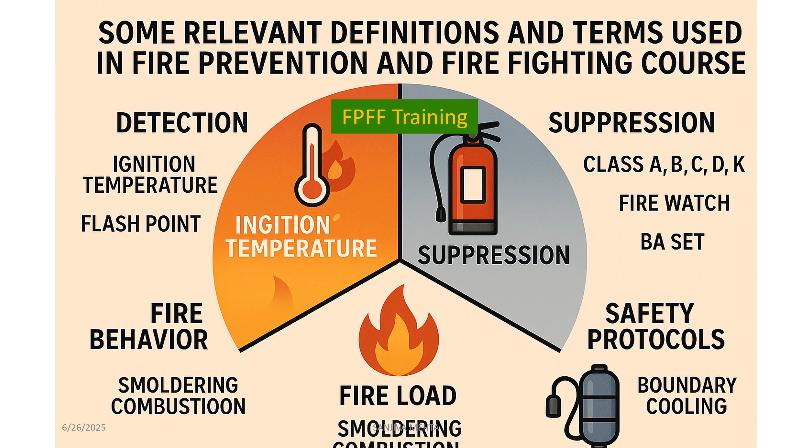In this, we will be talking about some of the terms which are used in the context of firefighting. Okay, fire prevention and firefighting. Basic firefighting. It's a mandatory course. Every seafarer has to do it before he joins the ship or any offshore platform. So this is module 2 we are going through, and this is chapter 3 of module 2.

In this, we will talk about relevant definitions, terms which are used in firefighting training, for firefighting purposes, and also in the FPFF course, so that you understand the meaning of those terms. All right, and then we'll proceed further.

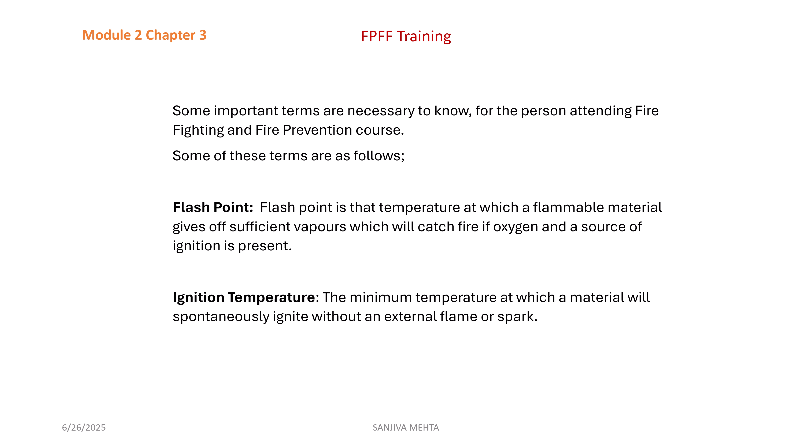Spontaneous ignition. It takes place when the flammable material is heated to its ignition temperature. So we know the ignition temperature is the temperature at which vapors catch fire. In spontaneous ignition, sometimes this temperature is reached through oxidation, which I was explaining. During oxidation, heat is given off.

Although the outside temperature, or the temperature where the oily rags are kept, is not that high enough to cause ignition, because of the oxidation taking place of the oil in the oil-soaked rags, the temperature is rising, maybe in a limited area. That reaches ignition temperature and it catches fire. So we say spontaneous ignition has taken place.

So spontaneous ignition also takes place when oxidation of flammable material takes place, like oil-soaked rags. Because of the oxidation of the flammable oil, heat is generated. Fire may occur without any apparent reason.

Flashover. The near simultaneous ignition of all combustible material in an enclosed space where temperatures are extremely high.

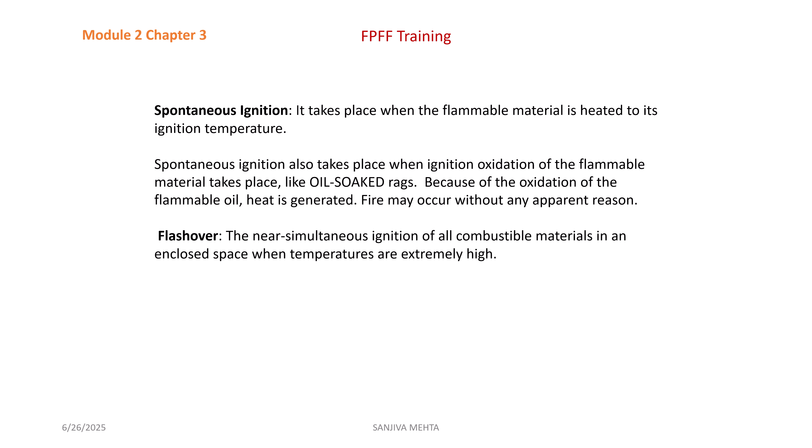Flammable material, inflammable also. It's the same thing. English language is confusing, nevertheless. A material which is capable of being ignited and burning, that is combustion, is a flammable material. For the purpose of our course, the terms flammable and combustible material are interchangeable and have the same meaning. Also inflammable material.

Fire extinguishers, portable devices used to put out small fires. They are categorized by their extinguishing agent: foam, CO2, dry chemical. There can be 9 liters, 9 liters more common. There can be 36 liters also. They're kind of fixed actually. Portable ones, which you can carry, generally are 9 liters. The 36 one, you can say, is not exactly portable, but fire can be fought at a distance also, because the hose can be laid down.

Fire detectors, devices that detect the presence of smoke, heat, or flame, triggering alarms to alert the crew. Because whenever smoke is present, whenever heat is present, large amount of flames are present, fire is likely to take place. That's why these fire detectors.

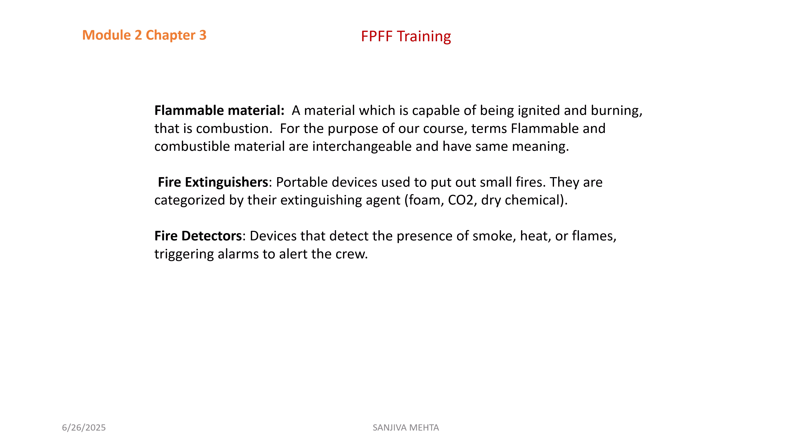Firefighting system, built-in system on ship such as CO2, which floods the engine room, for example, or the cargo hold, hyper mist, sprinklers, or foam systems designed to extinguish fires in a specific area like engine room or cargo hold. Hyper mist has become very popular nowadays. We'll talk about hyper mist in a separate issue.

Hyper mist basically is a sprinkler, but a much improved version. Hyper mist can be used even on electrical equipment. How? Why? Because in hyper mist, water particles are so small, but they have a large surface area because there are a number of them. The moment they fall, they evaporate, taking the heat away. So it quickly cools the specific area where the hyper mist spray has been aimed. Very interesting. Okay.

Breathing apparatus. A protective device providing a supply of clean air, allowing firefighters to breathe in smoke-filled environments. We need oxygen. If the area is filled up with smoke, how to breathe? So we use the breathing apparatus. SCBA, commonly called self-contained breathing apparatus.

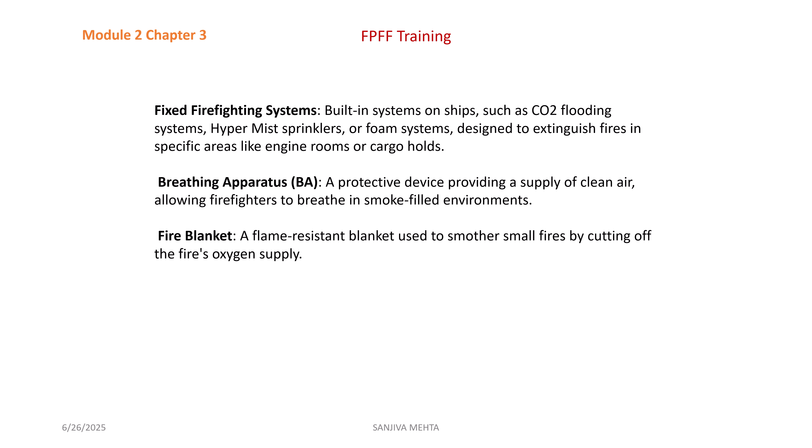Fire blanket, flame-resistant blanket used to smother small fires by cutting off the fire's oxygen supply. Smothering, fire dies down. Boundary cooling: the practice of applying water to adjacent areas of a fire to prevent heat transfer and contain the fire spread. Let us say the economizer, exhaust gas boiler in the machinery spaces is on fire. You start spraying the casing with a large amount of seawater. All right, so it will cool down.

Inert condition, a condition in which oxygen content throughout the atmosphere of a tank has been reduced to 8% or less by volume by addition of inert gas. Usually, it is referred to in context of cargo tanks of oil tankers. Earlier I had informed you fire cannot sustain if oxygen percent is below 12%. But mandatorily, inert condition means oxygen percent is less than 8%. So there is, you can say, a safety factor. All right, because 12% is touch and go. So we make it much lower, 8%.

Gas free. A tank, compartment or container is gas free when sufficient air has been introduced into it to lower the level of any flammable, toxic or inert gases to those required for a specific purpose. For example, hot work, entry, etc. And usually it is also referred to in the context of cargo tanks on oil tankers.

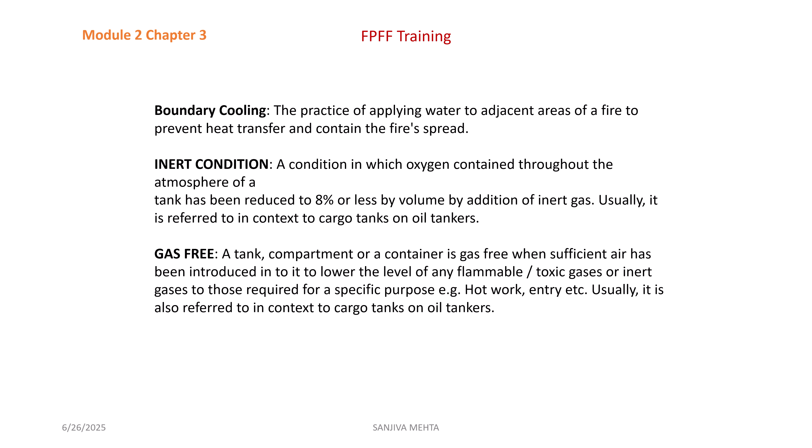Lower flammable limit. Flammable vapors, to burn, require a minimum or lowest percentage of these vapors in air to get ignited when a source of ignition is introduced. Some percentage of hydrocarbon or flammable material vapors has to be there. If the percentage of flammable vapors is below this percentage, the mixture of flammable vapors and air will not burn, no matter how high the temperature. This lowest percentage is called LFL or LEL, lower flammable limit or lower explosive limit. Similarly, we have a higher limit also.

Flammable vapors to burn requires a percentage of vapors and air to get ignited when a source of ignition is introduced. If the percentage of flammable vapors is above a certain limit, the mixture of flammable vapors and air will not burn. This is called HFL or HEL, higher flammable limit. So there is too much percentage of flammable vapor, hydrocarbon. Fire will not take place. Okay, too much of everything is bad.

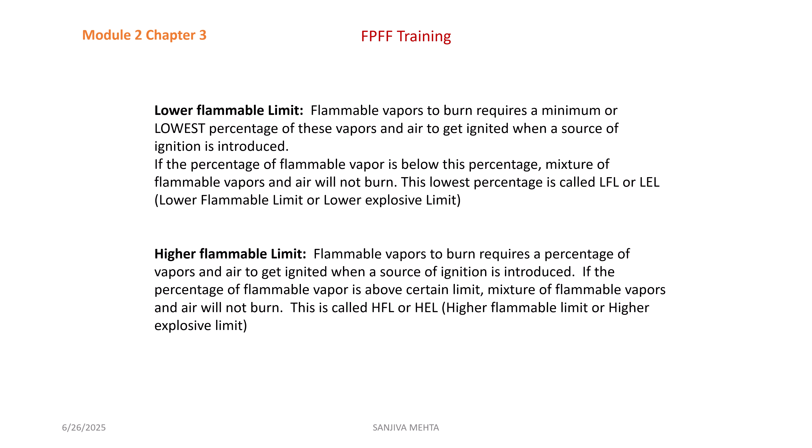So generally, the limit between LEL and HEL or HFL is called the flammable limit, range of flammable limits. Generally, LEL and HEL limits refer to hydrocarbon vapor percent. Therefore, flammable range refers to hydrocarbon vapor percentage between the LEL and HEL. Flammable range for most hydrocarbon vapors is between 1 to 10%. A little bit of variation, but generally it is 1 to 10%.

Hazardous area. An area on a tanker vessel where electrical equipment which is installed must be explosion proof, also called flame proof. Why is this area called hazardous area? Where the hydrocarbon vapors are expected to be present and they are expected to be in the flammable range. That's why it's called hazardous area.

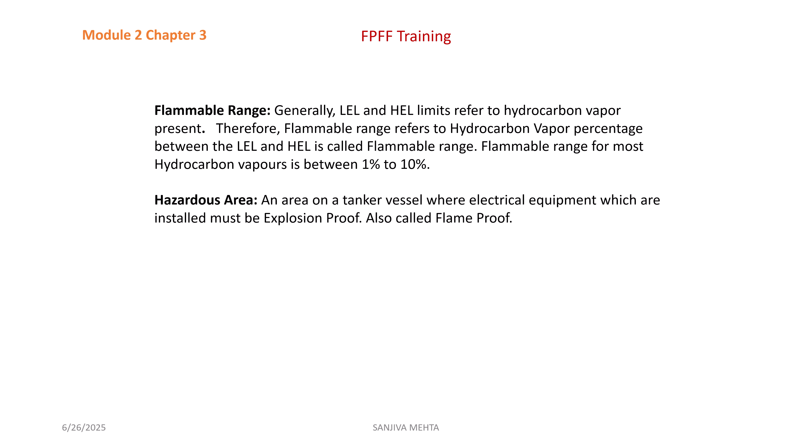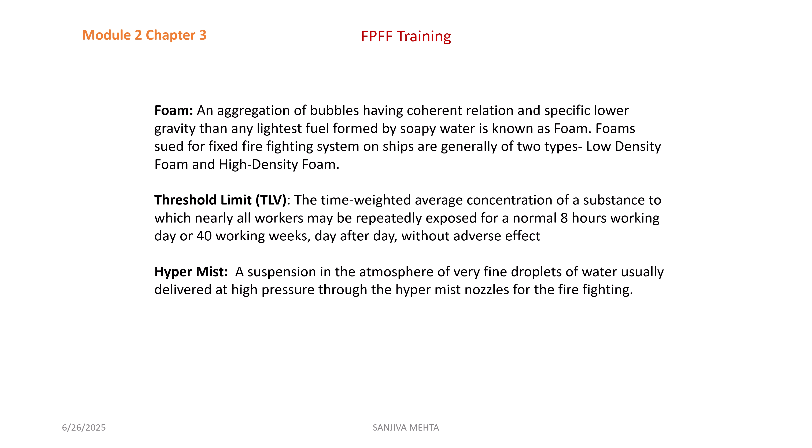So I just told you what is high density and low density foam. On deck, when you have to fight fire, you use high density foam. In the machinery spaces, low density foam is used, because for the same amount of foam compound, you get a larger amount in low density. Why do we use high density on deck? Because it's a bit denser, otherwise there are chances it will blow off with the air when the ship is moving, or the air which is surrounding. All right, that's the only thing.

So this is the end of module 2, relevant definitions and terms. If more definitions come, I will explain them as they come. Shortly I will be preparing another module, chapter 4, module 2. Very important. Actually, all modules are important. Stages of fire. What is incipient fire? What is the fire at its full glory? How does the fire look when it is dying? All this we'll learn in stages of fire.